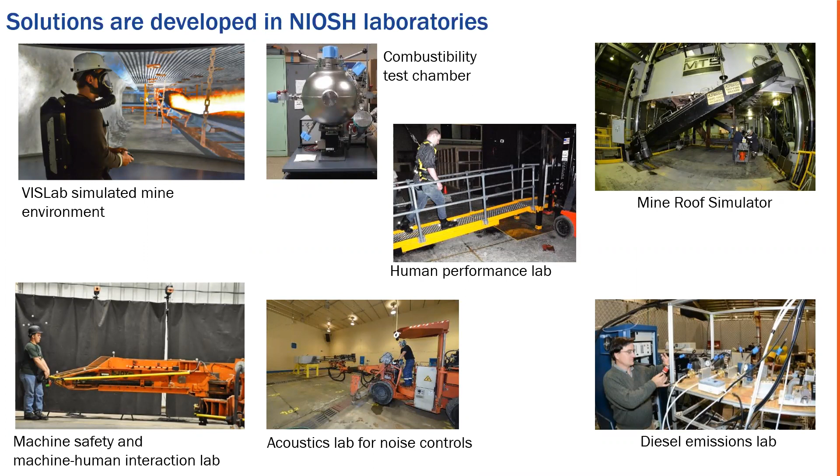So what we do at NIOSH, specifically at the Pittsburgh Mining Research Division, are a number of different mining health and safety research activities. I won't get into all of them because I'm already going to be talking for a long time, but feel free to peruse these slides later in the recording or the file that Juan sends out. But for the most part, it's behavioral studies, maybe lighting and dust studies, ground control studies, everything that affects the underground mine workers' health and safety.

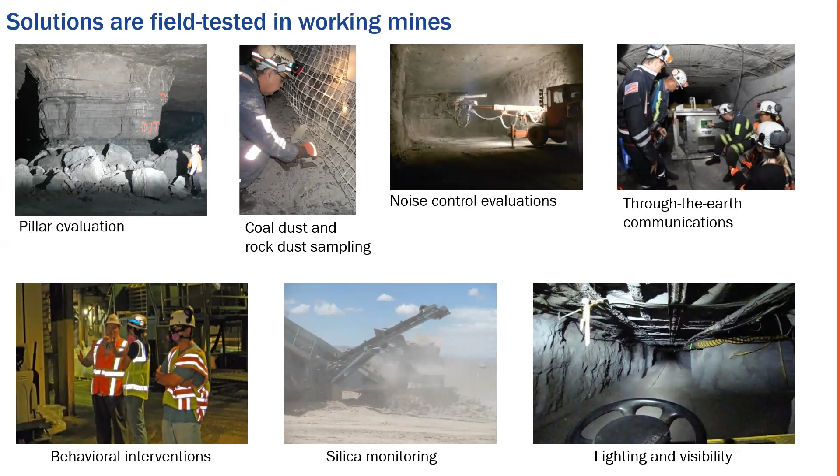Here are just some more examples of some of the research we do at the Pittsburgh Mining Research Division. So ground control, what I work in, the ground control branch is one small part of what the organization as a whole does. But I like to think it's a very important part, so I'm going to talk about it for a while.

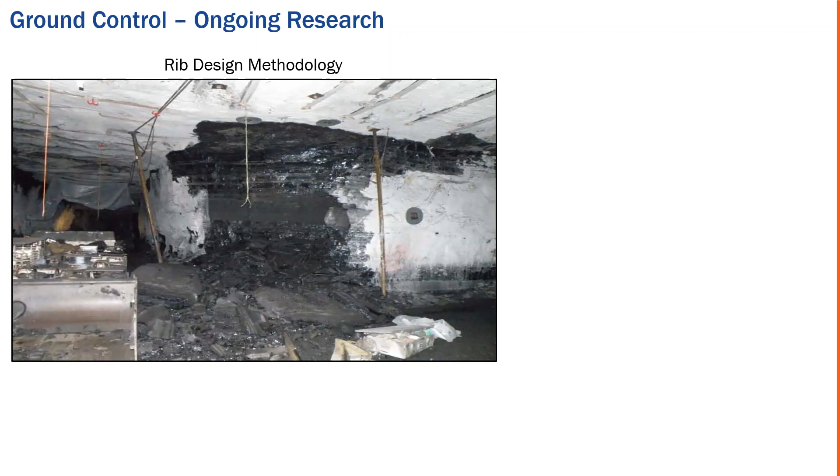Now, in our branch, we break into usually about 3 commodities in Pittsburgh, and that's coal, gas, and stone. So on the coal side of things at PMRD, we have ongoing right now a rib design methodology project where we're looking at underground coal mine rib stability. So what kind of support you might need for different ribs in different environments at different depths, different rib constituent parts, something like that, and how to design around that.

Also a total entry stability assessment project, where we're looking at openings adjacent to active development, such as longwall panels and how those deform as that panel passes by.

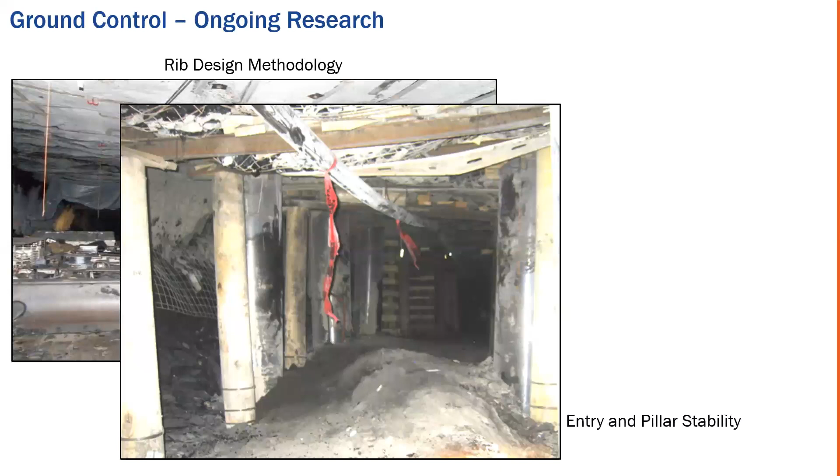And from a gas well standpoint, or gas well stability standpoint, we have a project looking at gas wells in the vicinity of retreat mining or longwall mining that might compromise the integrity of that well casing and cause gas to leak into the mines. So that's another big project we have going on, which is especially a problem in Pennsylvania, where we have so many gas wells and longwall mines at the same time in very close proximity to each other.

So those are the other commodities. The one I'm working on is stone, which I'll get to in a second. But while we're still in this coal frame of mind, you may have also heard of some of our past research related to underground coal mining ground control in the forms of the software packages that have been put out throughout really the past 20, 30 years.

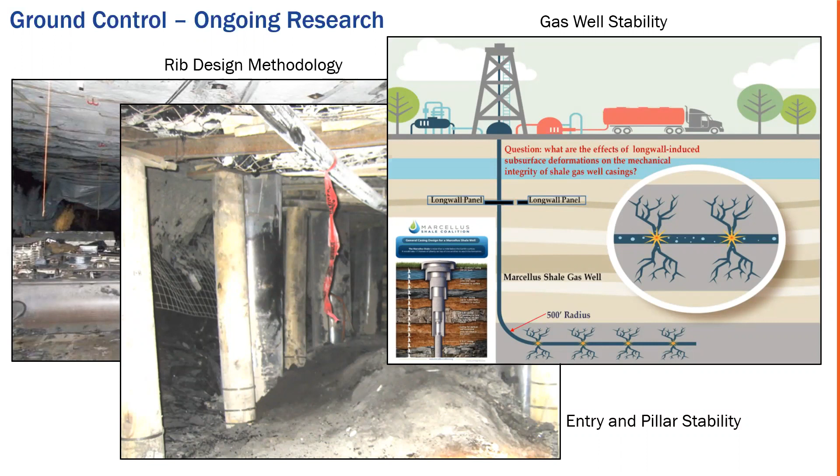I know we learned ARMPS in school there at Virginia Tech. We may have messed with ALPS a little bit. I don't know if we did a lot with ARBS and some of those other ground control toolbox software, but they all fall into the NIOSH umbrella, or Bureau and then NIOSH umbrella. So if you've heard of those, that's who we are, people that made those.

Now transitioning into stone mining, this is mostly what I work on. I can somewhat speak to that other research that's going on, but this is more my wheelhouse right now, the underground stone industry. So if you're familiar with coal or metal, I'm just going to kind of contrast this with those industries. With underground stone, we've got about 112 some odd underground stone mines in the country, depending on how you count them.

And they're defined by, well, defined by being stone. But some of the characteristics that set them apart are their hard rock strength, so in the 80 to 150 megapascal range is usually the kind of strength you're seeing in an underground stone mine. You have prominent bedding, usually have one or two prominent joint sets that are steeply dipping or faulting. You've got a room and pillar mining method where everything's laid out on a grid, either square or rectangular pillars.

You've got pillar widths that go from 35 to 100 feet and pillar heights that go from 15 to 100 feet, so a wide variety of different pillar shapes and sizes. You don't have to deal with explosive atmospheres, so MSHA approvals and permissibility for the kind of technology you use inside the stone mine is a great boon from a research perspective.

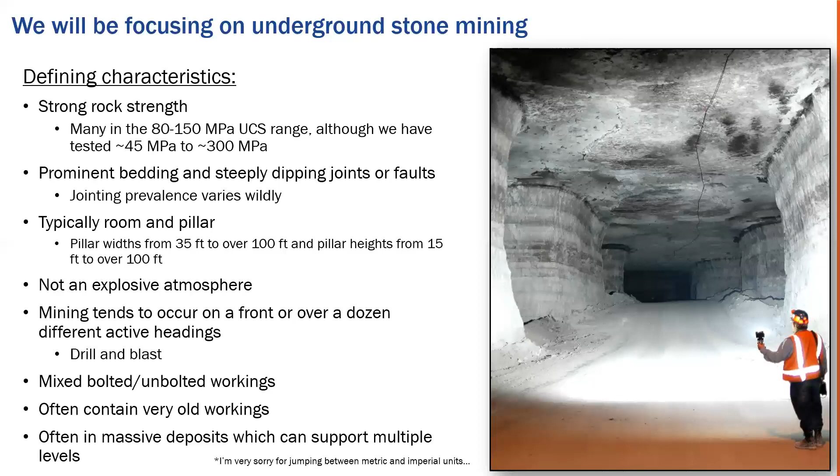So that's the industry. Now, what does this have to do with our research right now?

About, I'm losing track of years now, we'll say 15 to 20 years ago, we had a pretty big underground stone research effort at NIOSH. I think largely this was led by G.S. Esterhuizen, Tony Iannacchione, Dennis Dolinar. People like that were researching a lot of the underground stone problems that existed at the time.

And out of this, they developed a tool called S-Pillar, which you might recognize a lot of the input parameters from programs like ARMPS, where you put in pillar dimensions, so widths, heights, your material properties, the rock strength, depth, all these different parameters that you would need to design pillars that remain stable in underground mine workings.

So that's what it's for, is plugging in your mine parameters, and it gives you a design chart that tells you if your pillar is going to be likely stable, or we can't say that it's probably going to be stable. That's what S-Pillar gives you. So this is a software that helps you design underground stone pillars, which is great.

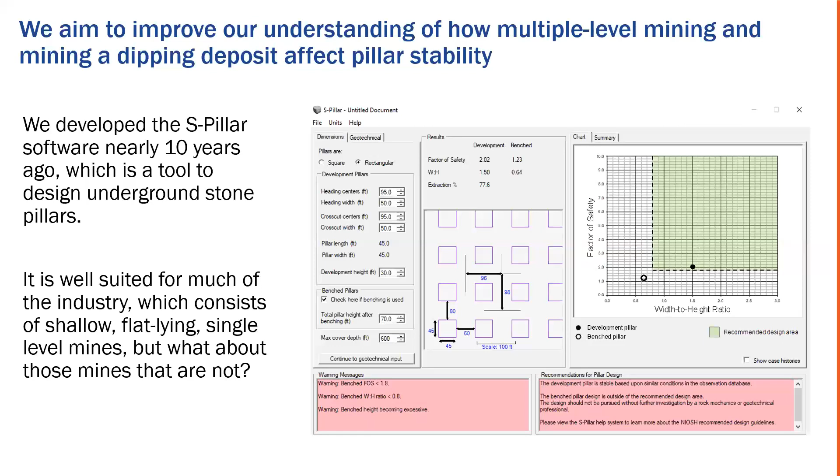So right now we're doing some fundamental research to try and understand what makes those situations different, and can we use the software? Can we use these underlying equations in those environments? Or do we have to come up with some new way of thinking of how to design mines in those challenging environments? So when I say challenging, I tend to mean mines that are dipping significantly, mines that are multiple levels, or mines that are very deep.

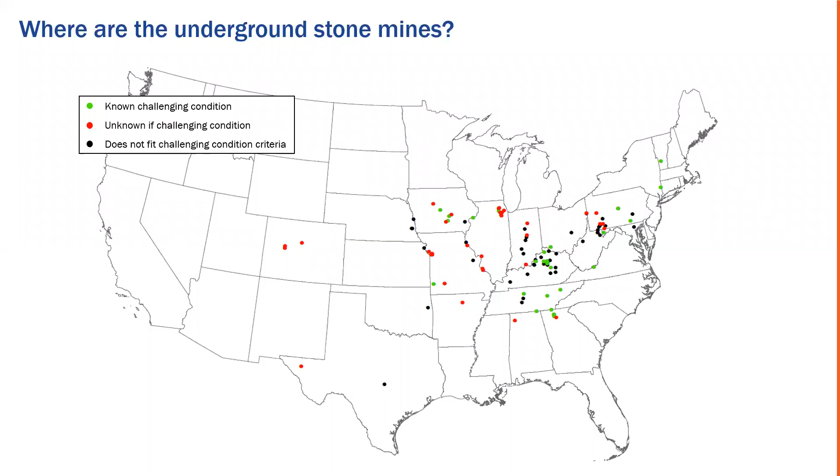So just judging from this, you can see that probably about half the industry could use some enhanced recommendations or guidelines from this research. So we've got a target audience here, that's who we're trying to reach. Now, what do we do about it?

Now I'm going to walk through the research process, our thinking, and all this. This is where you're free to poke holes in it or ask questions. But we're starting from a place of how do you determine the strength of a pillar. That's really what we're after. Is this pillar going to remain stable? How strong is it?

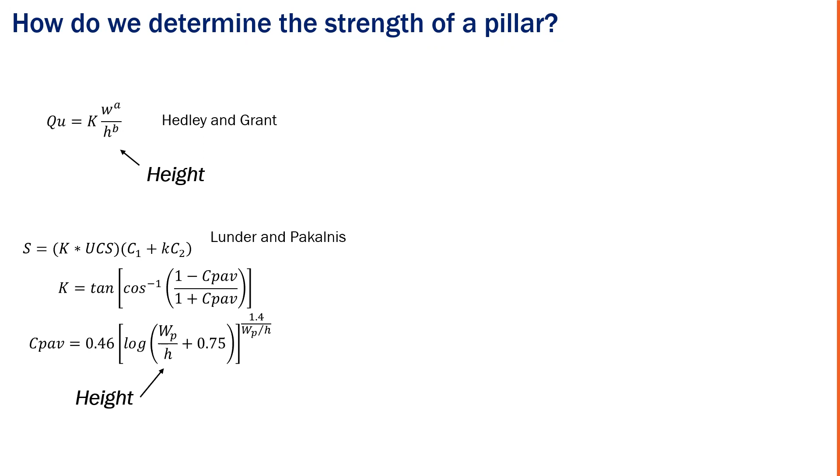I usually hate to put equations into a presentation, so just gloss over them. The important thing out of these is the height component. Here we have the Hedley and Grant hard rock pillar equation, kind of the grandfather of hard rock pillar equations. We've got another one, I'm just cherry picking hard rock pillar equations here. Lunder and Pakalnis, this one goes down a couple levels deep, but ultimately does boil down to a width and a height component.

The one that G.S. Esterhuizen developed for underground stone mines is also very dependent on that width and height of a pillar, which makes sense, that your pillar strength would be some function of the width and height of a pillar. I think we can all agree on that. All the experts have agreed on that throughout time.

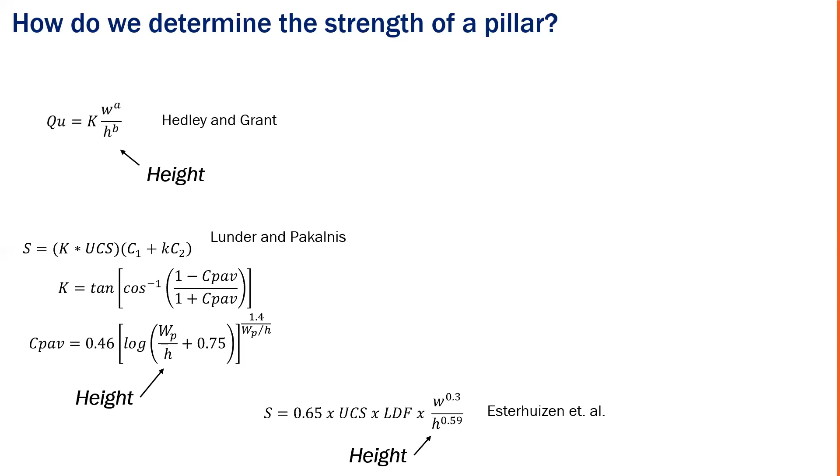But the problem for us comes in with quantifying that height component when your pillar is dipping. And also when your pillar is multi-level, but we won't get into that for now. When your pillar is dipping, how tall is it? In fairness to the first couple equations here, they were developed based on pillars in the Canadian Shield, which I think are pretty much all dipping significantly. But regardless, we want to figure out what number to plug into these equations, or if they still apply when you've got some kind of differential height.

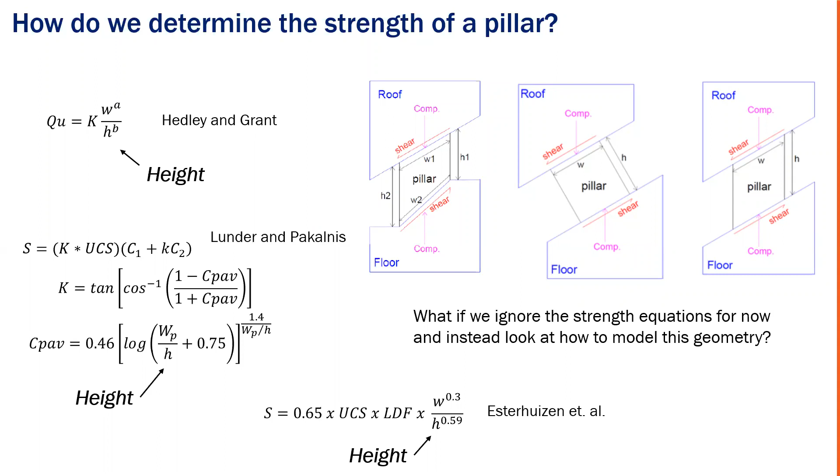Now let's take a look at multi-level. Here's my quarantine special analogy.

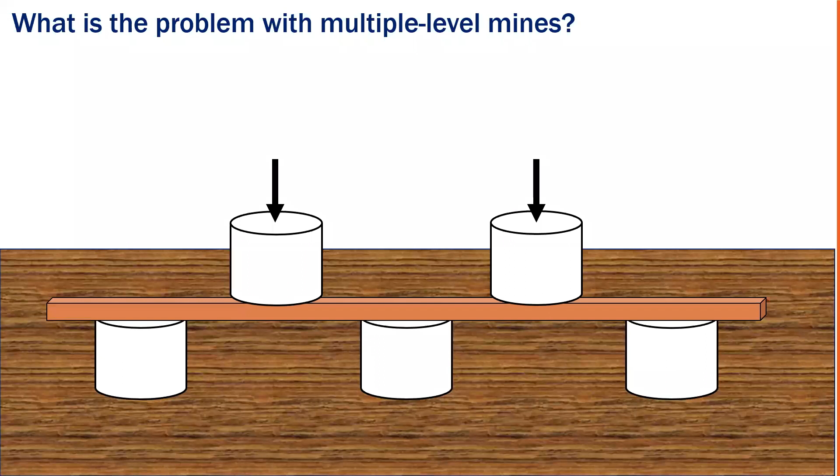So real quick, just how we're conducting this research. We've got a research question: how much interburden rock do you need between levels of a mine? So from there, we go to the actual research itself.

And I remember from graduate school, and I'm sure Dr. Westman will as well, hearing you've got numerical modeling, lab studies, field studies. A good research project should probably have at least 2 of those. And I really understand now that a lot of that comes from a place of trust and validating the findings that you've come across over the course of this research.

Because I can't tell you how many numerical models I've seen where it's like, yeah, I understand the results you're getting, but I don't trust they're real because I think you put garbage into your input parameters, or you're tweaking something I don't understand and you haven't validated it against a field study, or against something I understand in the lab. So I'm just going to throw out everything you presented to me. So I think it's important to build that trust, which is something we're going to do here in the form of field studies that validate our numerical models.

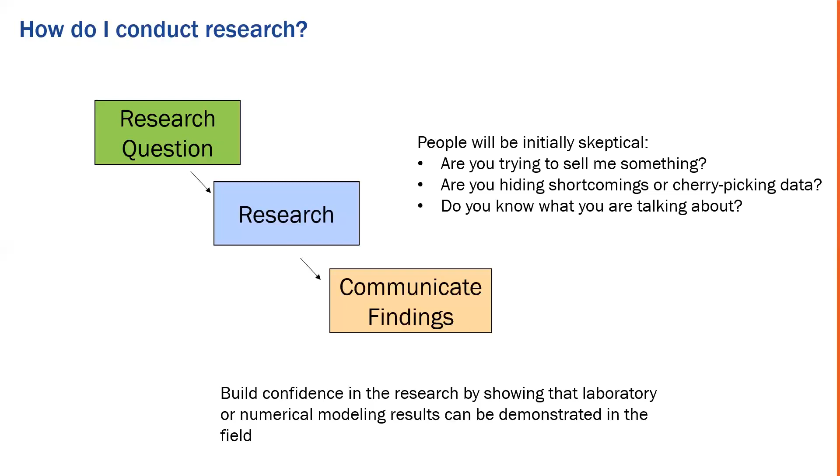And that's pretty much just what I said here. Communicating those findings, it doesn't matter how great your model is if no one believes it. And I firmly believe people are inherently very skeptical of numerical models. So that being said, let's tie that into our instruments.

So I'm going to go over some instrumentation that we're using at our field sites right now, and how we've been successful and unsuccessful with them. I'm sure if you've taken Mario's instrumentation class, I don't know if he still teaches it, but he did when I was there, you probably learned about a number of different methods of calculating stress, displacement, and other rock responses to loading. But for us, we stuck with the vibrating wire biaxial stress meters for our stress monitoring.

And this is just, think of it as a metal cylinder that we insert into a hole in the rock and grout it in place. And then as that rock or that pillar, in our instance, takes load, it's going to compress the cylinder. And as the cylinder compresses, there are wires inside of it that are going to shorten. And as they shorten, the frequency across them changes. And as that frequency changes, we can start to infer, based on the properties of the rock and the properties of the cylinder, what kind of stress we're seeing in the rock.

So that's really what these do. And they tell us that stress in two axes, or really a plane, so we can get the principal stresses.

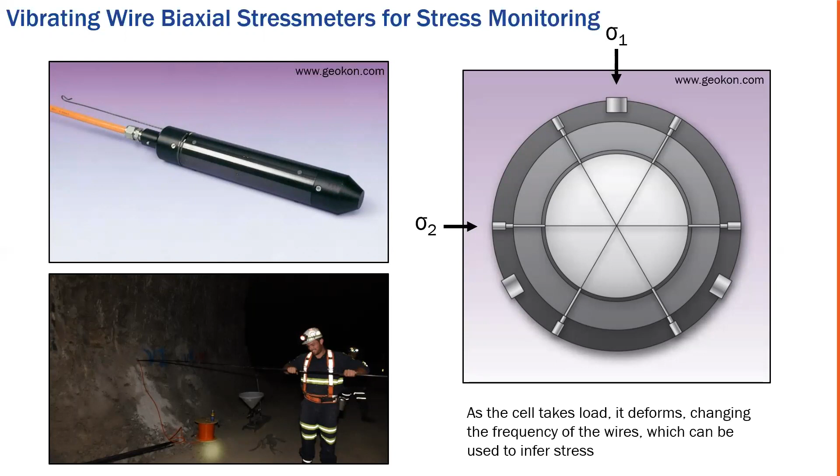To complement this, we also have a seismic monitoring program at some of our case study sites. We use uniaxial accelerometers, and we have one triaxial accelerometer installed.

For the most part, these pick up microseismic activity that occurs in the rock. As rock breaks, it creates energy that travels through the rock, and we pick up that signal as it hits our accelerometer. When it arrives at each sensor, we can use that to triangulate where the event happened. So we can start to watch events happening in certain places and infer that damage is occurring there. Why is it occurring there? Then we take that further into our fundamental understanding of why the rock is breaking.

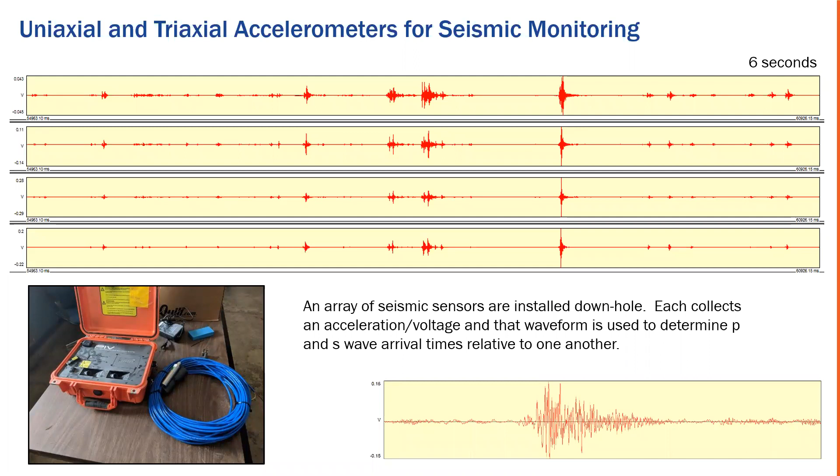Probably the last instrument I'll talk about is LiDAR. If there's been a seminar, you've probably seen Juan and Richard talk about this a good bit, but we are also using LiDAR for ground monitoring. You'll usually see this in a tripod-based or vehicle-mounted manner underground. We do most of ours with the tripod, but we do have one site where we mount something onto a truck to scan.

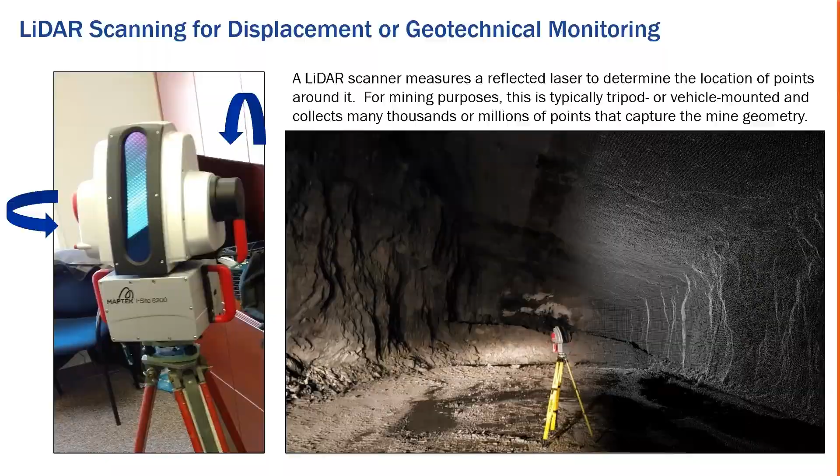But for the most part, this just shoots a laser into a rotating mirror. We measure the time it takes that laser to bounce from the origin to the mirror to the rock and back. Using the speed of light, we can calculate how far away it is. So that's how it works, and it produces a nice geometry of the mine.

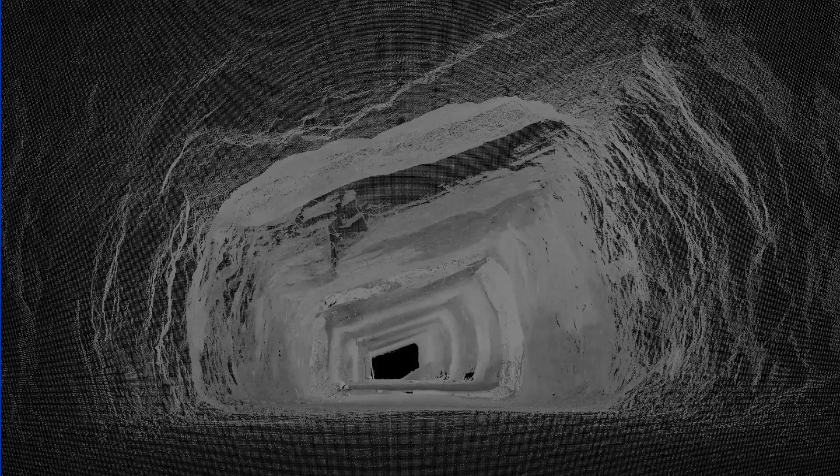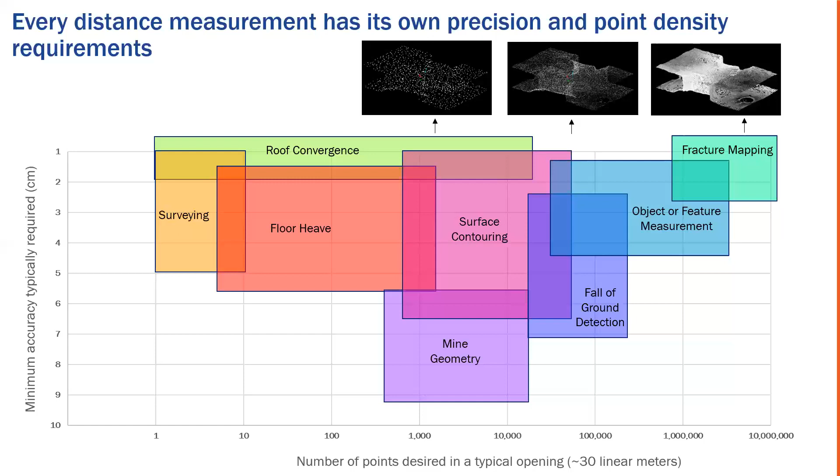Or if you want mine geometry, if you just want a basic structure of what your mine looks like underground, you don't have to be precise. You probably just need a few hundred points per opening. So that's where I'm getting a lot of this information. But look at it at your leisure and argue with me later.

With this LiDAR, what we're mostly using it for is geotechnical assessments. We're measuring joint faces for their orientation. We're doing elevation contours, which is really just coloring it by height, which sounds simple, but it's actually the thing that probably makes people the happiest when we show the mine some of our processed data, and we'll show you why in a minute.

The last one, which is probably my favorite, is change detection. So if you scan something multiple times, I scan it one month, then go back the next month, and I just see how that geometry changed. Where it changed can tell us a lot about that rock and its loading. I'll show you some examples of that as well.

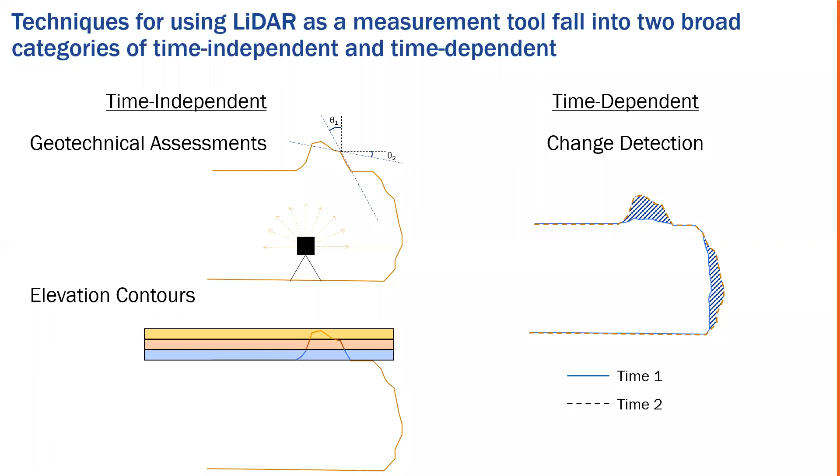But that's our instrumentation. So real quick, I'm just going to touch on our numerical modeling as well, because this is a big component of what we do and what's going to inform our research after our instrumentations are done. We use mostly FLAC3D at NIOSH.

That's what you're seeing here in these pictures, actually. We dabble in some other software, but for the most part we're using FLAC3D on this project. The way this numerical modeling software works, if you're not familiar: you build out the geometry of some structure, you input the properties of that structure—strength, cohesion, friction angle, these kinds of things—into the rock. You excavate, so you create voids, and then you watch how it deforms around that, where stresses go, what loads differently than something else.

So that's how we're using that. And you can see here on the right, you excavate that opening, and you see some deflection of the roof into the opening. We can use this to create situations that we don't actually observe underground, that we aren't able to observe underground.

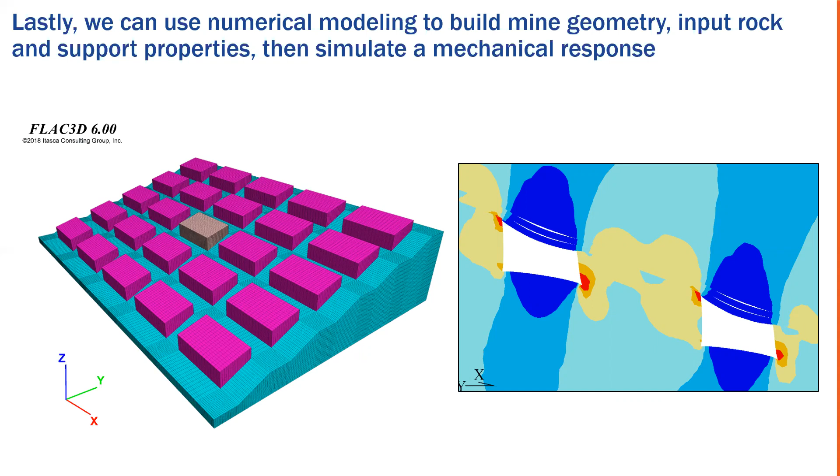Hi, Brent. This is Aman, I would like to interject. We got a question on chat from Christian. There is a chat? Yeah. I could ask it for you.

Sure. So it says, hi Brent, how much does NIOSH rely on numerical modeling tools? Could you possibly share your thoughts on how useful this might be? And have NIOSH used UAVs for digital mapping or not? So there are two questions.

Let me answer those one at a time. I can't speak on behalf of all of NIOSH, but at the ground control branch in the Pittsburgh Mining Research Division, we rely on numerical modeling a lot. Probably about half of our scientists in the branch have got some level of modeling expertise, from world expert to intermediate, and I think it's because even though we're able to access a lot of mines, you just are not able to instrument every possible condition you'd ever encounter. So we really do create models nonstop. We've got parametric studies running at any given time that occupy probably 6 or 7 workstations at our office. So I would say significantly is how much we're relying on these numerical models.

And for this project, every recommendation we make is going to go through a parametric modeling analysis, where we're looking at different mine dips, width to height ratios, strengths, stresses, and stress orientations, because we just can't instrument all these environments. So we use it a lot now, and we're going to use it a lot going forward. It's probably more useful to us than the instrumentation, if I'm being frank.

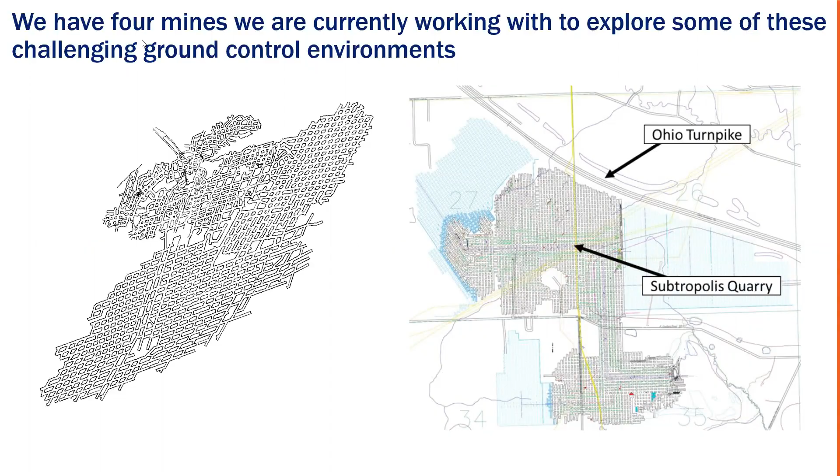This is a dipping mine, in central Pennsylvania. Remember earlier I said that a lot of these mines you might enter past some old workings - you can really see that reflected on this mine map. If you get in closely, up towards the top left is where the portals are, and you can see a lot of odd pillar shapes and orientations because they were mined many decades ago.

In fact, a fun anecdote about these pillars - the way they designed them, they didn't know how to run a pillar strength analysis to determine if it would support the overburden. So what they did was make a large pillar, incredibly large, hundreds of feet on a side, and they just cut it in half. Did it stay up? Great. They'd cut it in half again, so now they've quartered the pillar. Did it stay up? Great. They just repeated this process until the pillar started failing. So this worked, I guess - they were able to continue mining, but this is the process they used for designing pillars decades ago. I like to think we're a little further along than that now.

But where we are now for our instrumentation is in this area, kind of on the southeast. So that's a blown up version of our instrumentation area.

Our goal here is to instrument a pillar and watch it behave as it gets mined around. Remember, this is a dipping mine. In this area, it's about an 18-degree dip, dipping to the southeast. The dip is so steep that the crosscuts have to come off at an angle to create an apparent dip low enough for the equipment to traverse the slope. That's one of the complications introduced with these dipping mines.

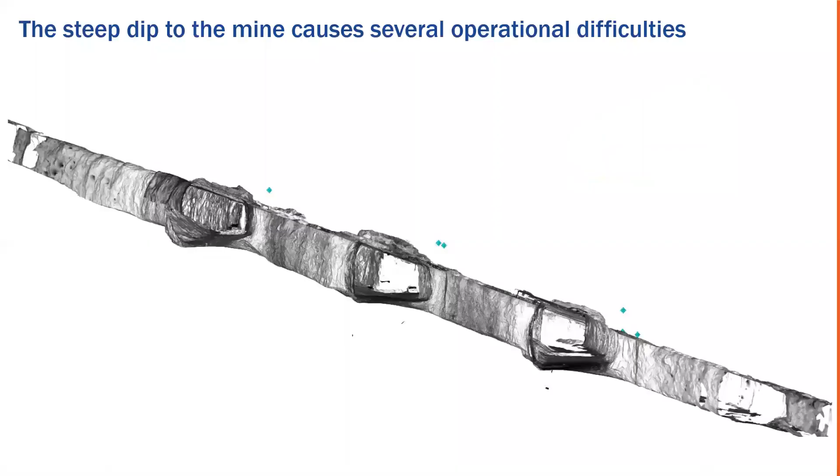You can really see the dip there of the crosscut on the left, and the headings are gently dipping towards us in this picture, maybe a couple degrees, but for the most part they're flat. Here's another laser scan cross section to help you visualize that dip.

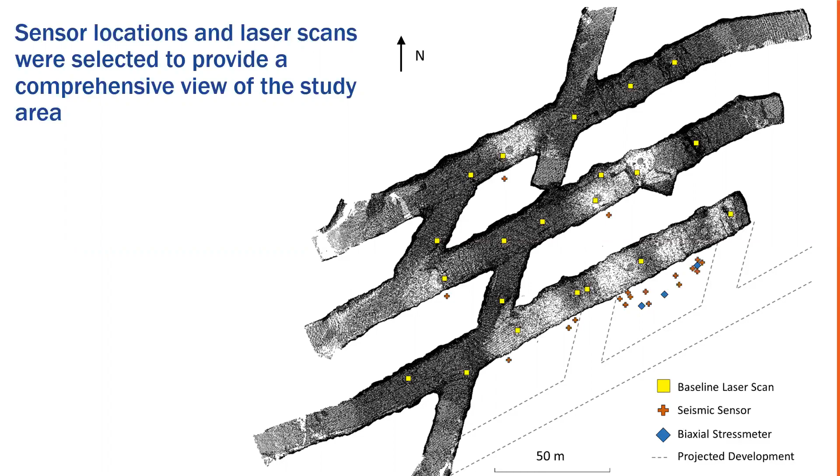What we found through this, actually, that wasn't intended, was that roof falls make for excellent places to characterize joints.

If you're just looking at a point cloud, or if you're a geologist on the ground going through an underground mine trying to find nice fracture planes to record and make a stereo net out of, you've got to deal with a lot of mess from blast fracturing. But when you're dealing with a roof fall, things tend to fall out along these pre-existing discontinuous planes, and you can find them in the laser scan. You're probably not going to get a man lift and stick your geologist up into a roof fall because it's inherently unstable, but you would do it in a laser scan. You could set up your scanner under it, back up a little bit, and let it go. So that's a huge benefit of this technology we didn't anticipate.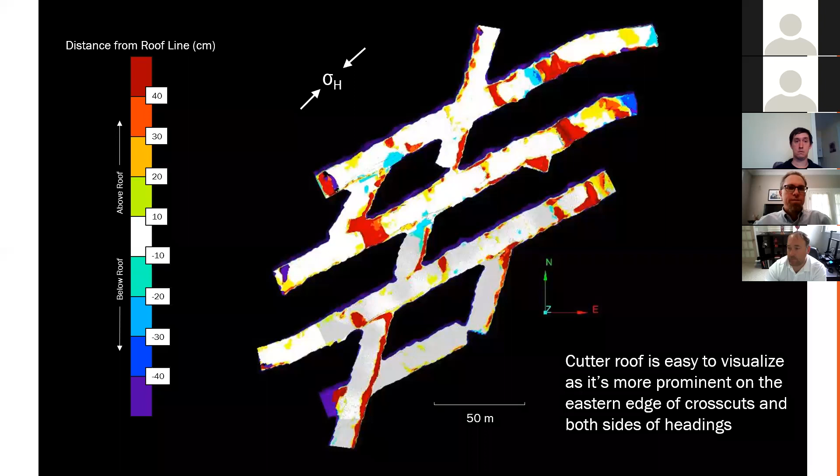This really helps highlight where the cutter roof failure is happening. You can see in all the crosscuts, for example, which are in an unfavorable orientation relative to the horizontal stress, that leading corner is pretty red because it's just getting crushed by that major horizontal stress. You see it's on the same side everywhere but that top crosscut, the very top middle of this figure, where it's on the other side because that crosscut was driven north. So fundamentally it lines up great with what we'd expect. You kind of see it on both sides of the headings, because that top side of the opening gets crushed from the horizontal stress, and the leading corner of the heading gets hit with the horizontal stress.

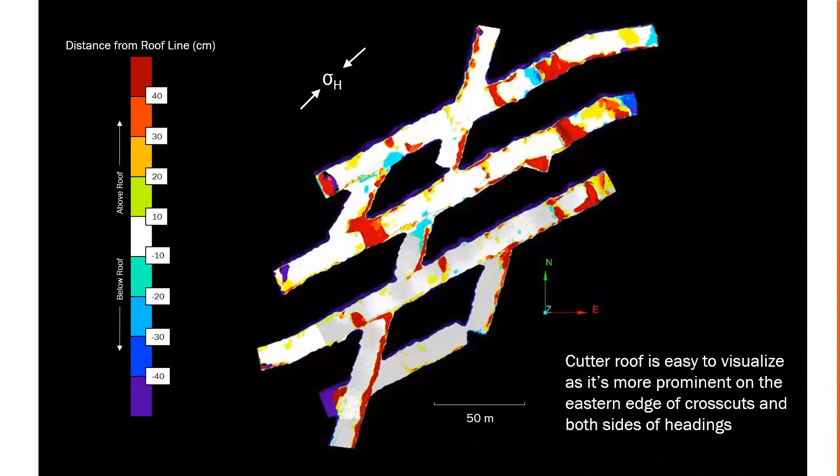So these are really nice to see, and we can quantify the damage. We can measure the volume of rock that's come out of the crosscuts versus the headings. So that's the elevation contours.

Now, if I jump to the change detection stuff, which is my favorite, we've really got spalling, probably the easiest thing you can identify here. The reason we do this is because if a rock mass is taking load, we expect there to be some kind of damage associated with that, to shed rock off the side or for material to spall or slough off. This also happens at magnitudes like you see here, 55 centimeters. It's usually tens of centimeters, sometimes hundreds of centimeters if it's a significant pillar stress event. Any LiDAR scanner is going to pick this up, even if it's a poorly registered point cloud. So that's why we love using this information to draw conclusions.

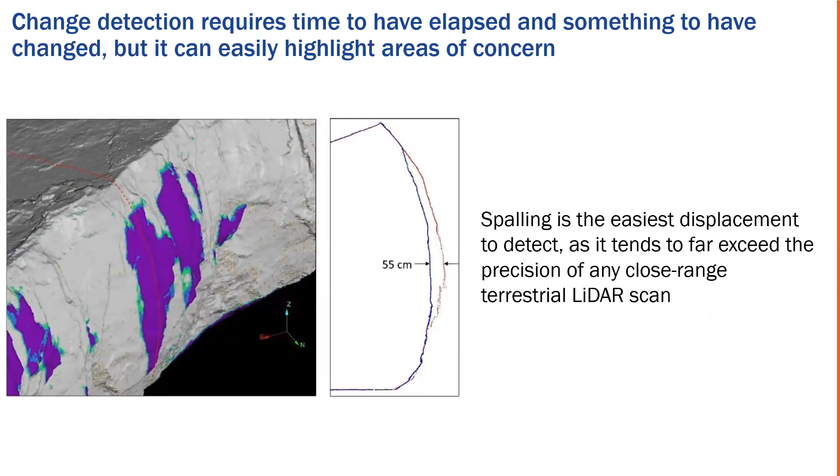Because I'm just going to roll through our instrumentation and what we're seeing with it. We also, remember, had the stress meters installed. They started mining down the left side there, so if you're looking at these projections, they mined the left crosscut first. One of those stress meters showed a significant uptick in stress as soon as it was mined adjacent to it. What we didn't see or didn't expect, and this is going to turn into a lessons learned lecture I feel like, was the impact of that horizontal stress relief on our instruments.

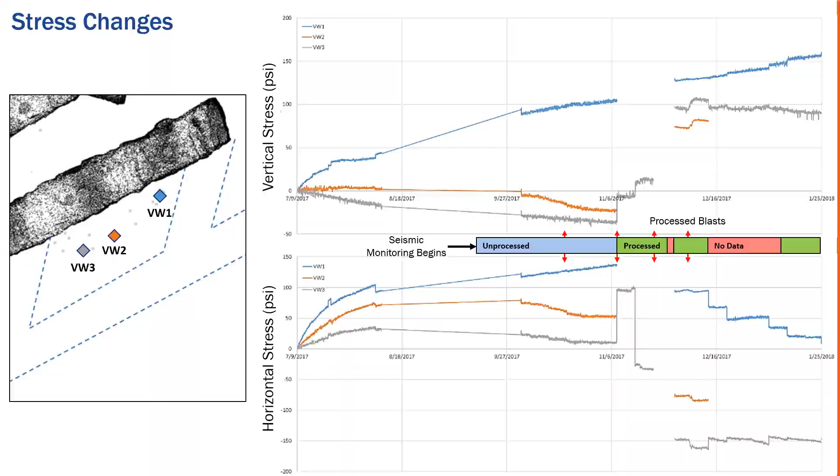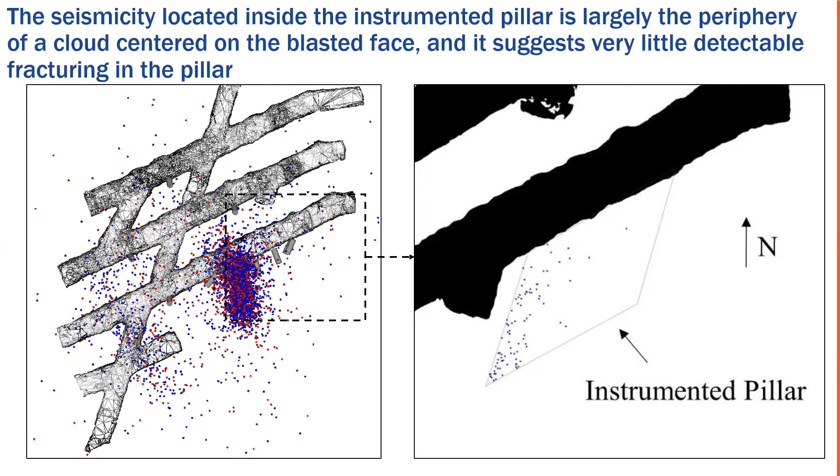And the last instruments we had installed, seismic. We caught a lot of microseismicity associated with blasting, really near that highly stressed corner of the excavation, but we didn't see a lot inside the pillar we were monitoring, which is where we kind of thought we would see some. But I think we just assumed that there's not enough loading on that pillar, and actually some unloading, if you think of the horizontal stress, that maybe we just wouldn't see the seismicity associated with rock fracture.

And the last thing I want to talk about at this site is our numerical modeling. So we modeled based on the geometry from the laser scan. It doesn't look like it's LiDAR geometry, but if you look at the Z axis on this, all the heights and widths really are taken from an average of points in the LiDAR scan.

So we modeled each blast. You excavate 12, 13 feet, let the model run to equilibrium, excavate another 12, 13 feet, do that. And what we found when we got to this intersection where we saw that roof sag is a sag biased towards that side. So it must be some function of either this crosscut orientation or the stresses or the dip. So there's something about this specific mine geometry that does reinforce what we saw in the field and the models. We're still in the process of tying all this together, but to give you an idea of how we're validating our models of what we're seeing in the field.

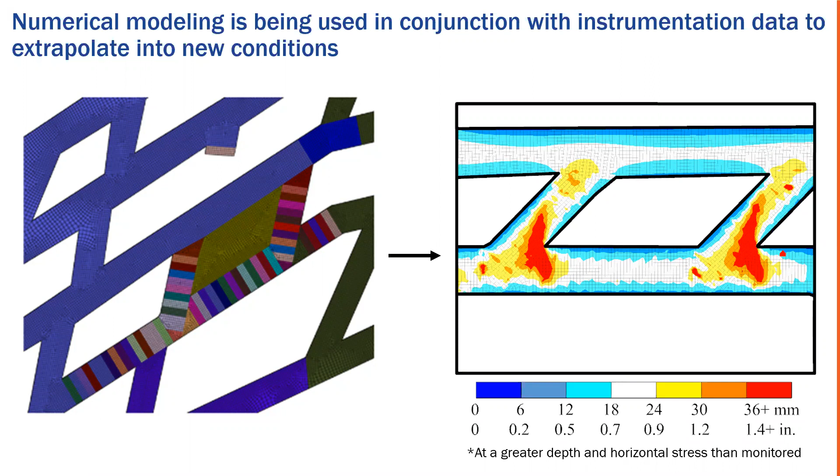Our next case study is going to include two mines. So we'll just move straight on into those, and Aman will yell at me if there's questions about the other mine. But this is our multiple level mine case studies.

A lot of mines, again, in these large deposits, maybe hundreds of feet thick. So you mine out your top level, you say, hey, well, we hit our property boundary, let's just open up another level below it, and maybe another one below that. So you might end up with these multiple level mines.

I'll just describe the mines before I get to that. Our first mine is a thin interburden mine case where that distance between the levels is 20 feet. Our second mine, same kind of situation: you got a top level, let's open up another level below it, 85 feet, so about four times as thick an interburden. And those are the two case studies we're going to compare.

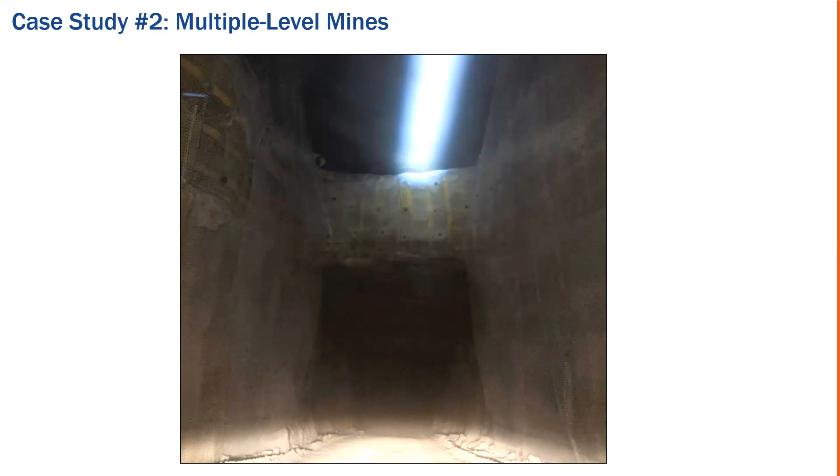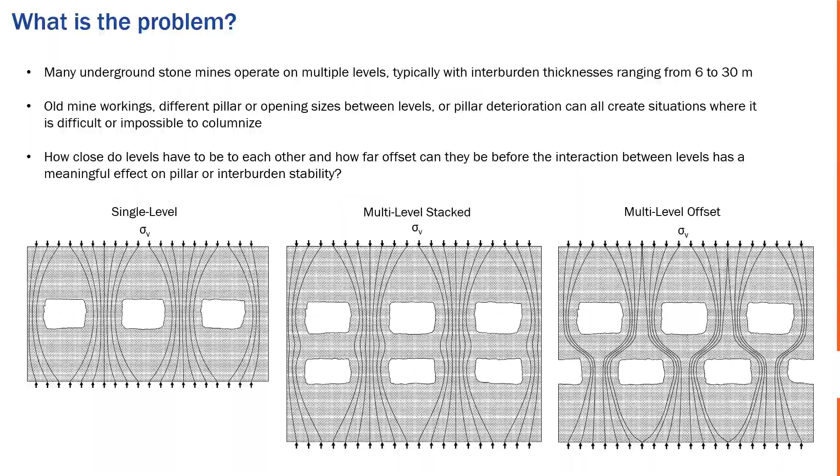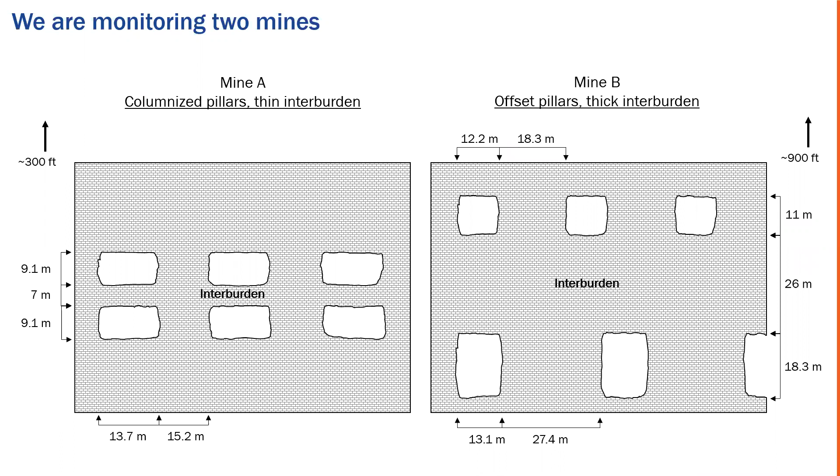So what's the problem? Well, as I mentioned earlier in our toilet paper analogy, when we've got pillars that are not stacked, you tend to have these stresses have to wrap through the interburden and can cause a failure. So in short, that's what that says, and we just want to figure out how close they have to be before that's a problem. So you see that thin interburden case on the left, our thick interburden case on the right. You see our pillars are stacked on top of each other on the case on the left with the thin interburden. They are not stacked on top of each other in our case on the right.

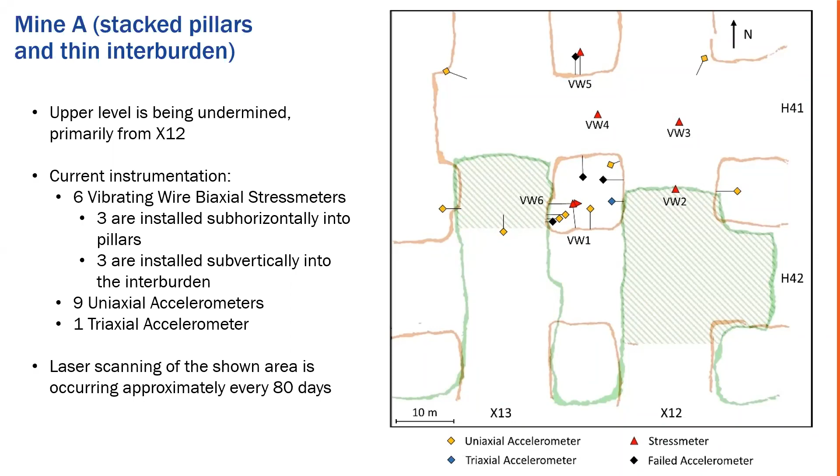And because these pillars are stacked, we expect stress to transfer pretty well through the levels for there not to be a big change. Because if you think about it, when you're mining underneath of an existing level and you stack your pillars, the rock you're removing should not be supporting that much weight because there's not a pillar directly above it. So there shouldn't be stress transferring through that, so we don't expect a lot of change. And that's pretty much what we're seeing here. That scale is negative 0.25 megapascals to 1 megapascal, so it's not a lot of stress movement we're seeing.

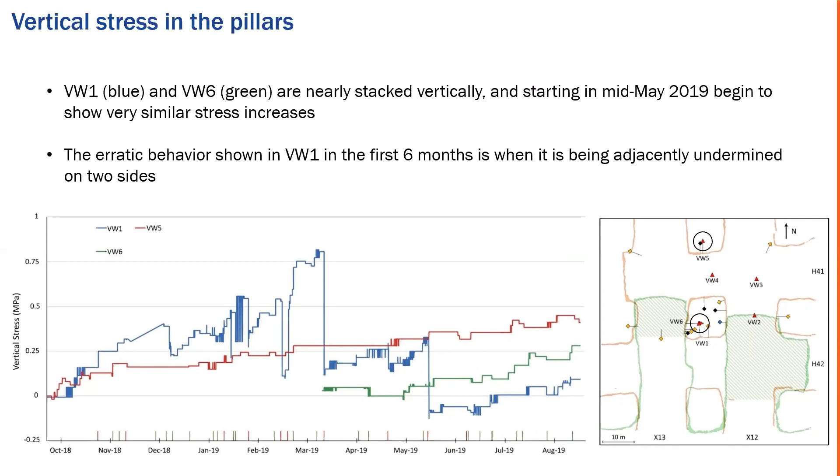What we are seeing is, I said they were stacked, but just because you try to stack a pillar doesn't mean you perfectly stack a pillar. So we find that when some of these corners overhang, we get a significant amount of pillar spalling. That's what you're seeing here on the left, progressive spalling of these corners of the pillar where it just was not perfectly stacked, so you see some elevated stress concentrations.

On the right, this is neat because I like LiDAR data. We actually saw the rock kind of moving out a little bit. We scanned it a few months later, it had moved out, and then a few months after that, it had fallen. So just an example of tracking the rock either becoming loose or dilating.

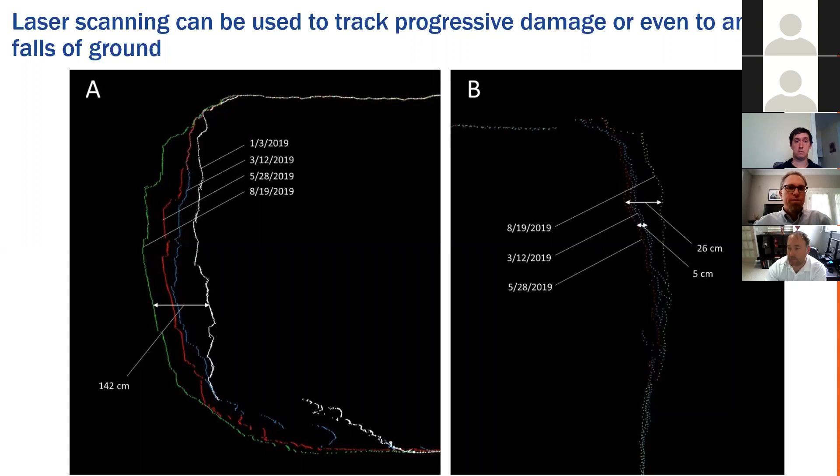Our seismic data here, this is a very old figure, but for the most part we're seeing events scattered around the study area. If you take the average of those, they do tend to coalesce around active productions, and we're hoping to see these preferentially in certain places around the interburden and pillars.

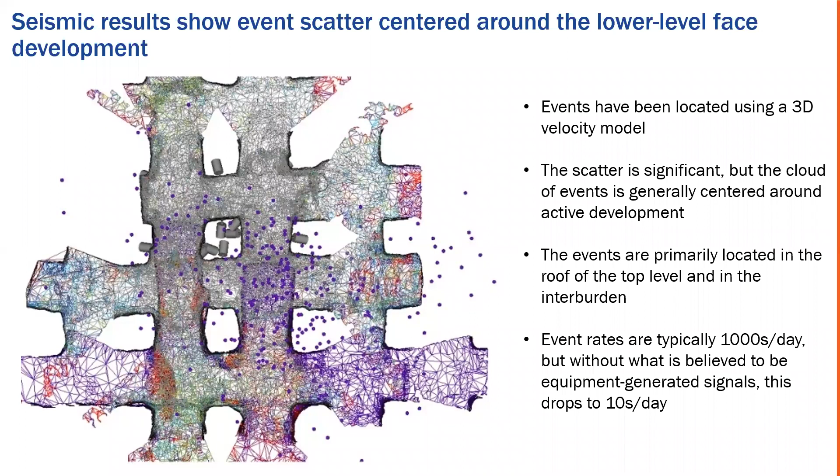Now the other mine, similar situation. Remember, top level mined, bottom level coming under it. We did not mess with seismic instrumentation here, mostly because of the cost and the people. We didn't have them, we didn't have the money. So we just did stress meters and LiDAR data.

So you see here where we put stress meters in a pillar before it was undermined. The idea is if you have a pillar on the top level sitting over what will become a void in the future on the bottom level, the stress should drop wherever that void is created underneath it, if there was an interaction. So we put stress meters in places that should experience stress drops, some places that should experience stress increases, and we're just going to watch them as they undermine, see what happens.

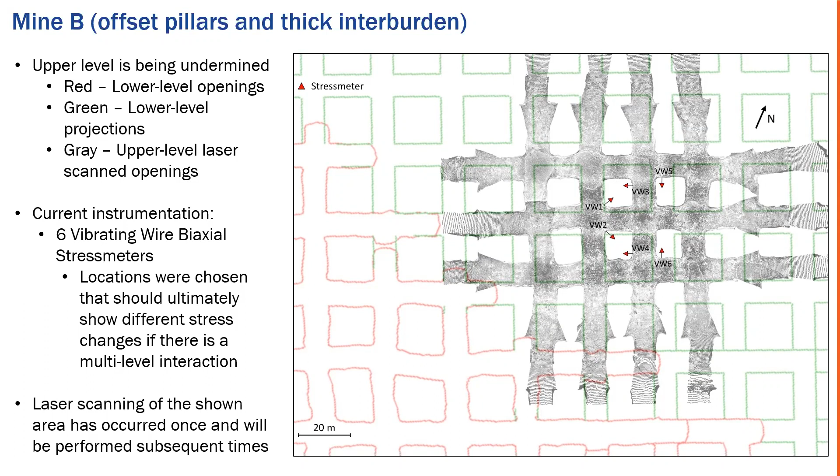Now remember, this is very thick, so there shouldn't be a lot of interaction. We modeled their case, where it's 85 feet between the levels, and we should see these stress meters move tens of kilopascals, essentially nothing. But if there is some interaction, we did an example where we modeled in FLAC 3D an interburden half as thick as what they have, and at that thickness you see stress changes on the order of several megapascals. So we're expecting to be somewhere between those two conditions.

I guess hopefully we see no interaction, but that's why we do the research, to turn that from hopefully into a definitive.

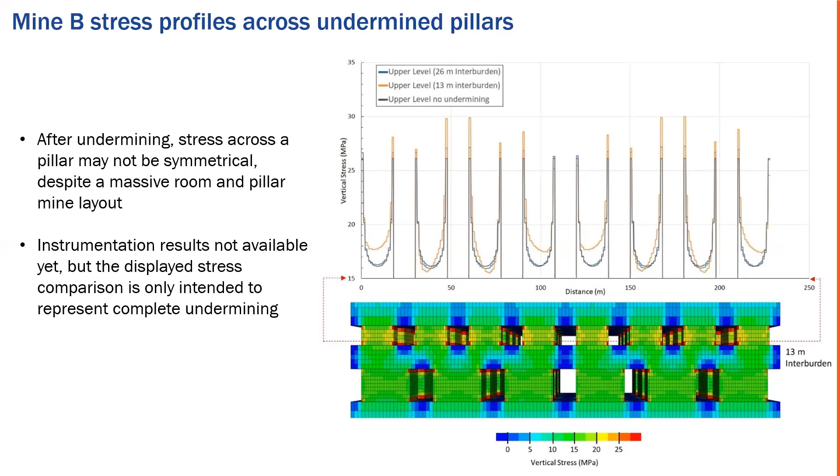And the last case study, last mine, then I can turn everybody loose. We've got the Subtropolis mine, the one I can name, and this is in western Missouri. It's not the traditional challenging in the sense that I defined it earlier. It's challenging in the sense that everything's going wrong.

You've got high horizontal stresses, you've got coal measure rocks all around this. The deposit's about 20 to 22 feet thick, sandwiched between shale and sandstone, with some coal mixed in there. And you're operating on thin margins. You only have so many control measures you can take.

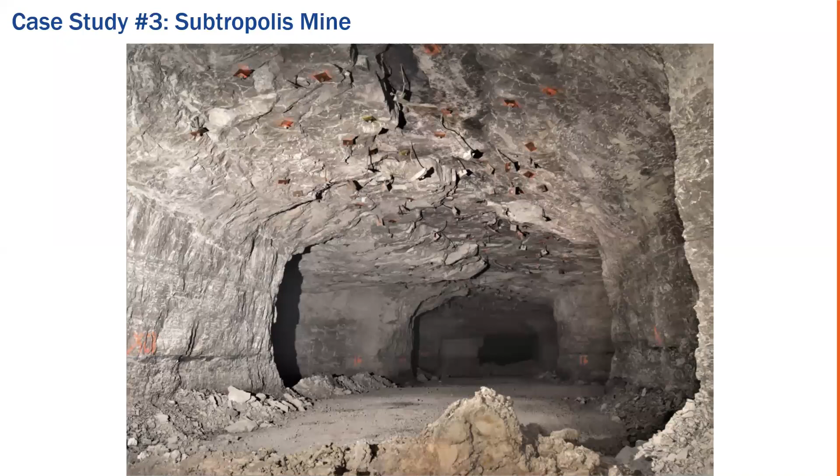So here's a picture of it. You can see a nice roof fall running down the middle of this opening, the bolts hanging out there. It looks pretty gnarly. I want to say it's atypical, but it's really not. You see this kind of thing all over the mine.

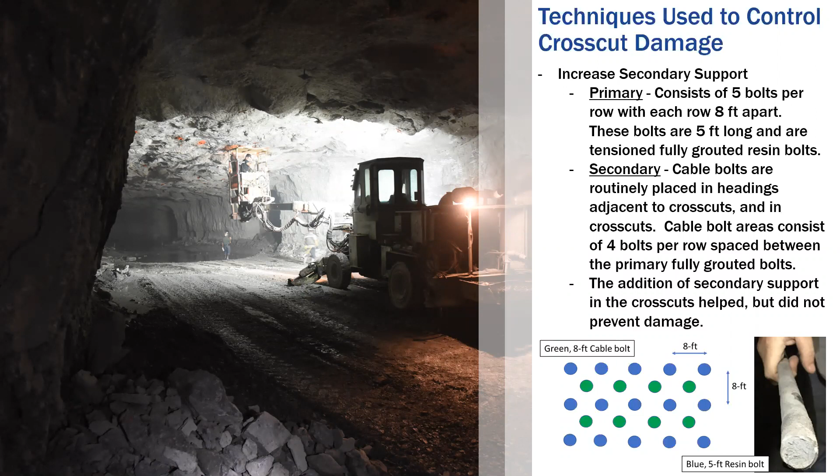So what do we do? In this new orientation, we expect our crosscuts to get hammered. Now we've got an engineering problem, so let's go down the list of easiest solutions. I feel like we're on number 19 or 20 right now. Just hitting some high points: bolting, you think increase your bolting. Well, we're operating on such small margins that we can't just double the bolting throughout the mine. But here's, if you're interested, the kind of bolting they're doing right now.

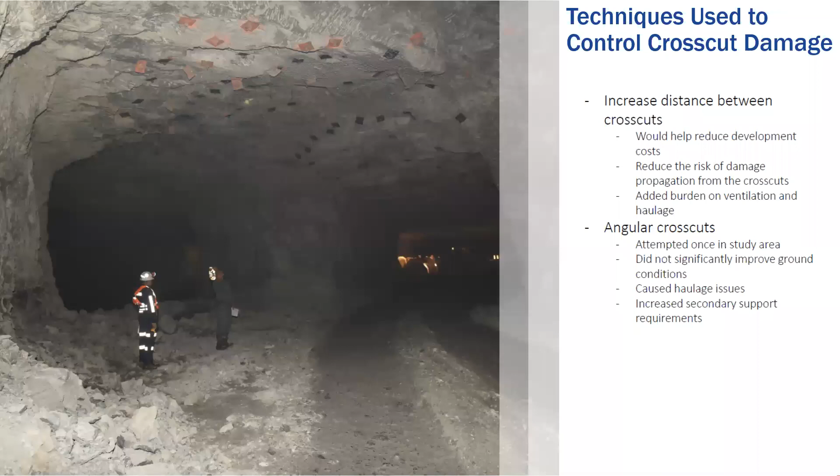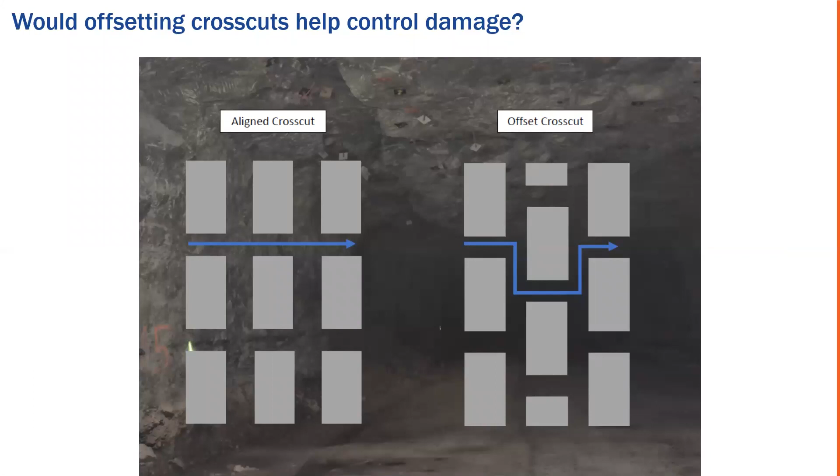Angling crosscuts, they tried that. It wasn't very effective, didn't seem to improve the situation much, and it caused a haulage issue. Can we offset our crosscuts so that when these falls occur, they don't just run through the mine? Well, the problem is they still snake their way through the mine when they did this, and it created a haulage nightmare again.

So right now we've gotten to the point where we've settled on these things called windows, where we essentially just drop the roof down a few feet, about 5 to 6 feet in this case, and create a thicker roof beam there that hopefully will not break from this high horizontal stress. And for the most part, that works.

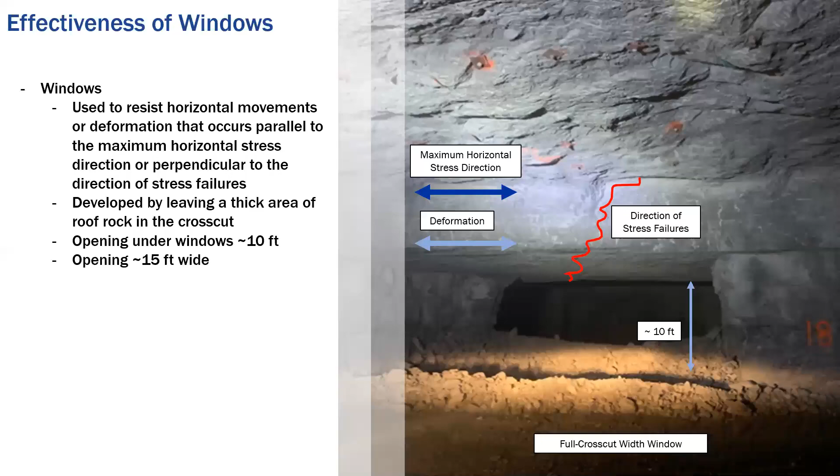But if I zoom in on one of those areas, you can see how one of those roof falls start in these crosscuts, they just start snaking their way through the mine, but they don't go through these windows. So the mine has adopted a lot of these windows. We've been studying them, and they're just putting them in as regular practice now to try and prevent this from happening. So that's how we're using that technology there.

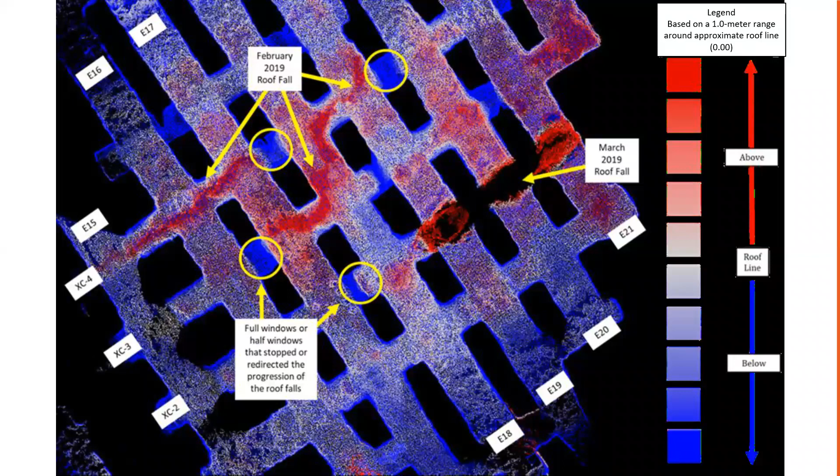But I should say, this LiDAR—I've shown you a huge area, but I didn't tell you that this is where we use that vehicle mounted LiDAR. Before, everything we did was with our tripod mounted one that I showed earlier. This, we actually contracted someone out with a LiDAR scanner on a vehicle to process this data for us. And we did it many times, and we're hoping to see some kind of change detection as well.

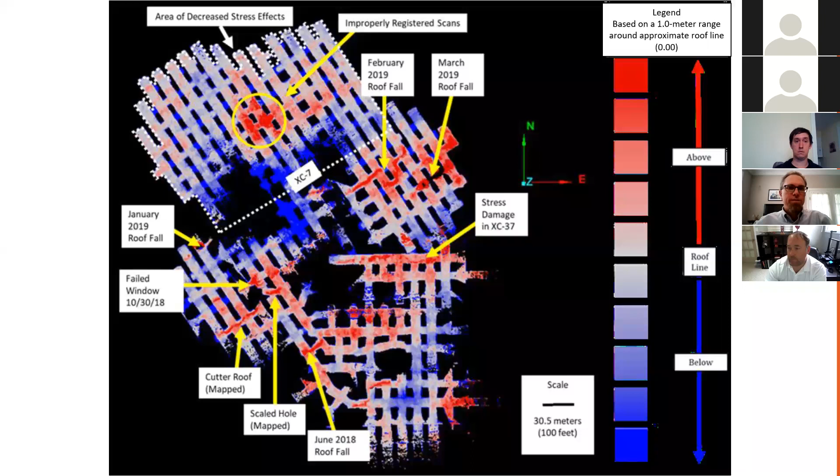Things we've learned, the lessons learned lecture: our instruments were probably too close to blasting in a few scenarios. The seismic array tended not to be the perfect solution to understanding stress and fracturing in the rock. When you're at such close proximity to your events, you have problems picking out P and S wave arrivals, you have equipment getting damaged, and it's hard to get a good orientation of your sensor relative to where the event's occurring.

So some problems there, but from here, I think we've got all these field studies, we've got all this instrumentation data, we've got these modeling programs going on, and you just tie them all together. And at that point, once we tie them together, we improve the models with the field, and we expand those models into parametric studies that test different interburden thicknesses, different width to height ratios, that kind of thing.

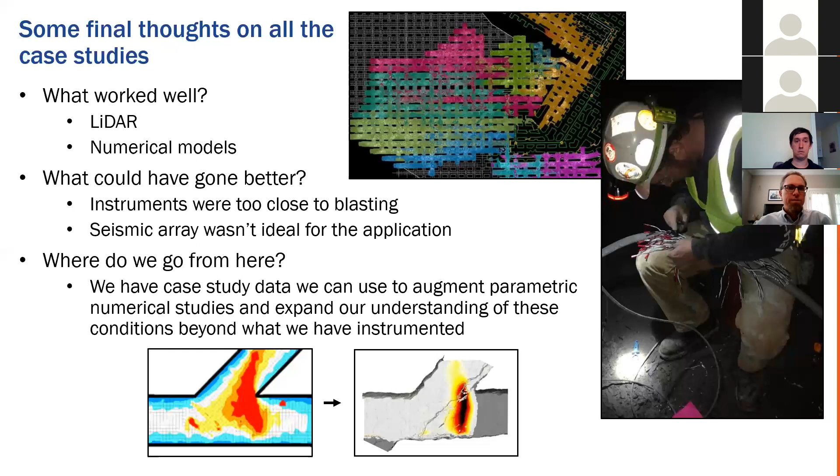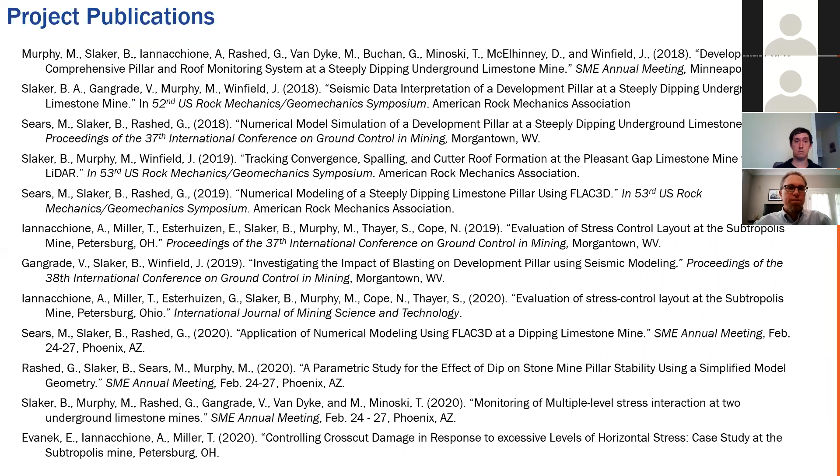Then we can start to make broad stroke generalizations and recommendations for the industry. So everything I put in here is stolen from various publications and presentations throughout the years. You can find them here if you're interested, for your reference in the future.